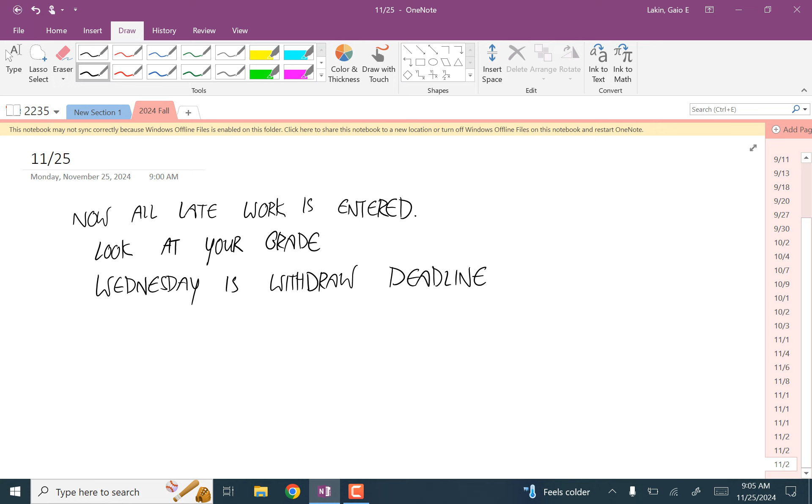All right, so we're going back to the example we were working on Friday. Oh, before we do that,

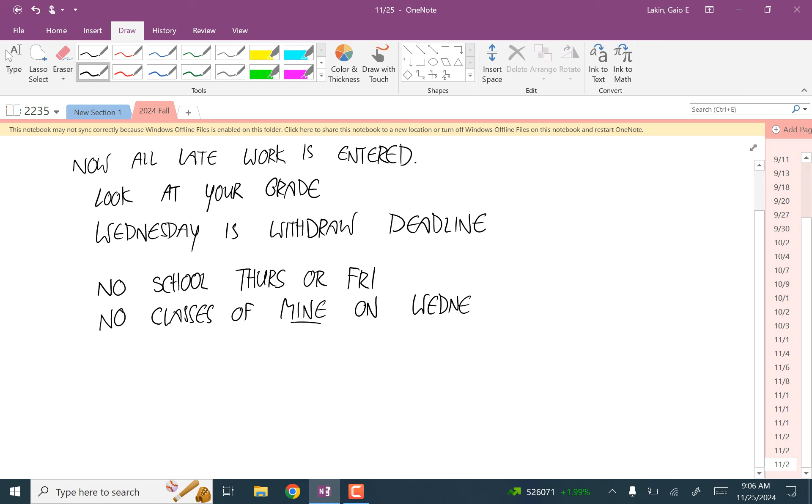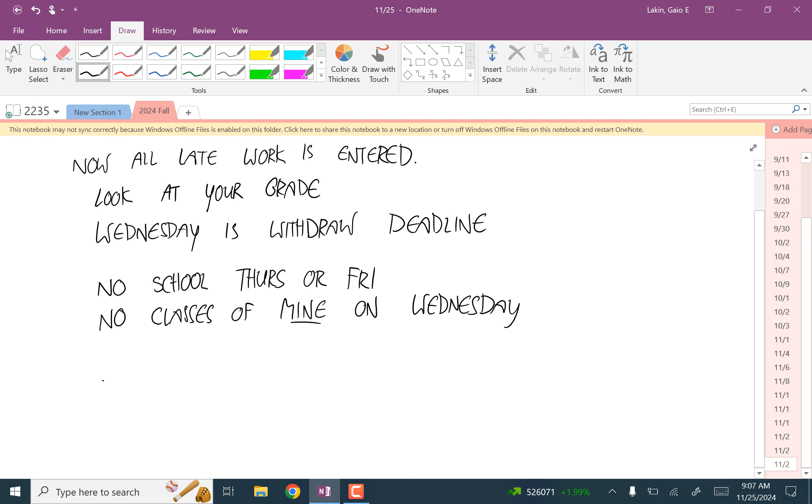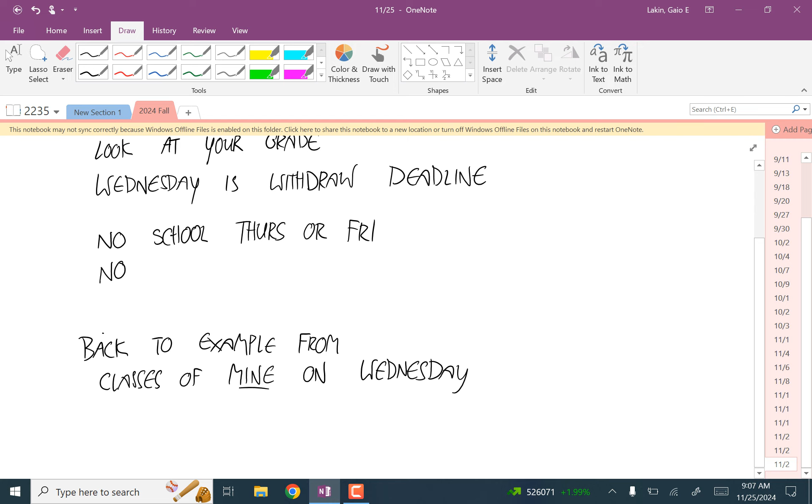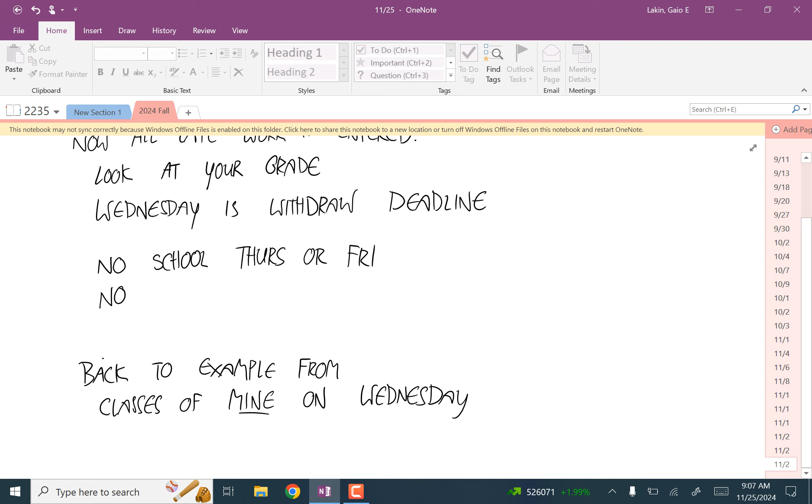All right. No, what did that do? Jesus. See, that's what happens when you try to be clever. I know.

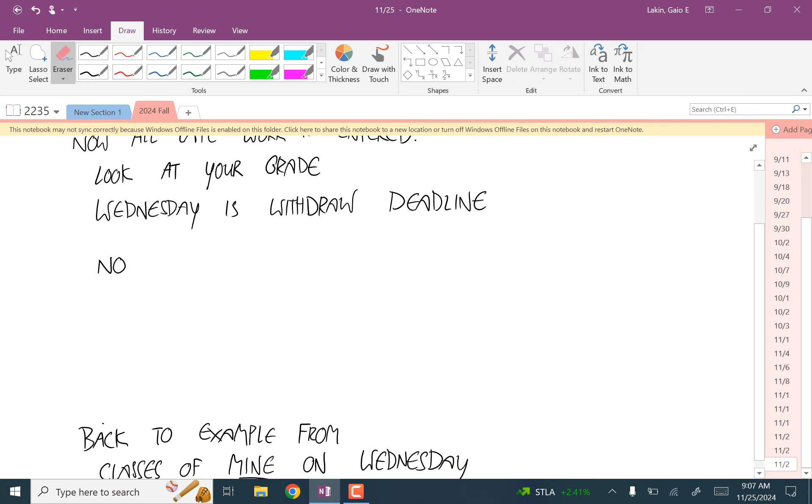Getting a little bit of a shining vibe there. No work, no play. Yeah. Yeah.

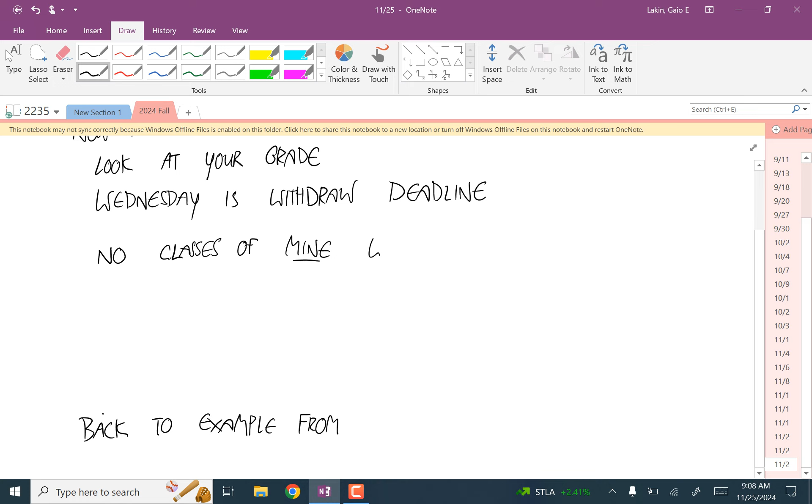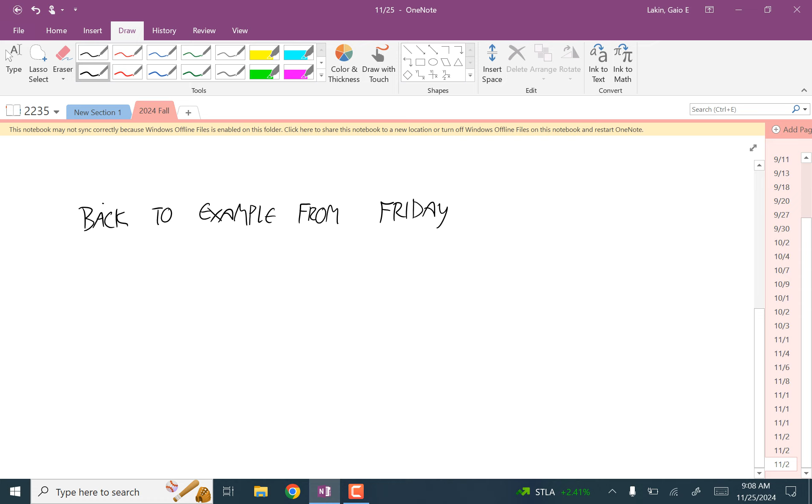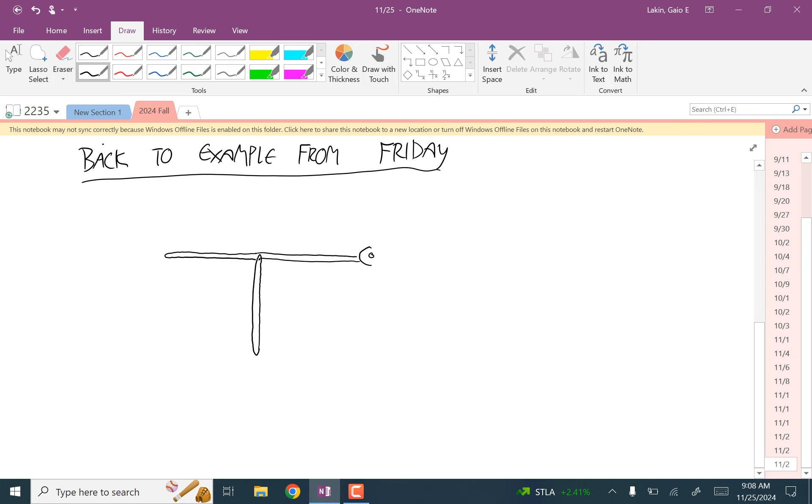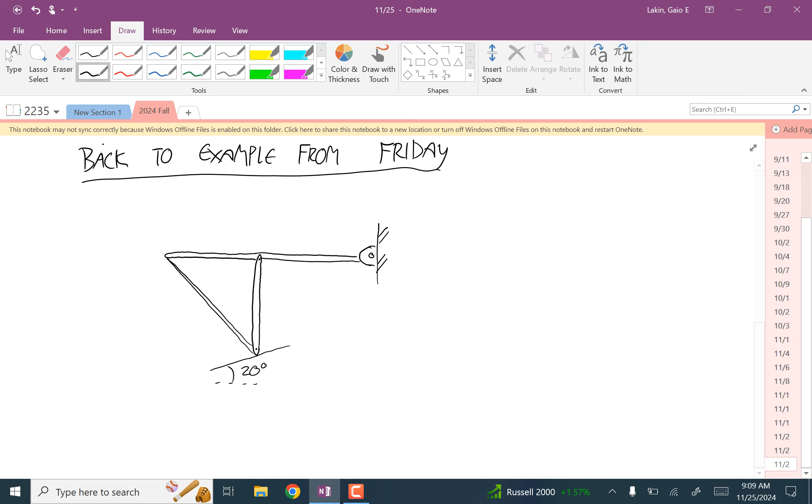Okay, so back to the example from Friday. And it looked like this. We had a vertical member, and a horizontal member, and a diagonal one connecting these two. And there was a frictionless contact here that made an angle of 20 degrees with the horizontal. And then we had a triangular distributed load there.

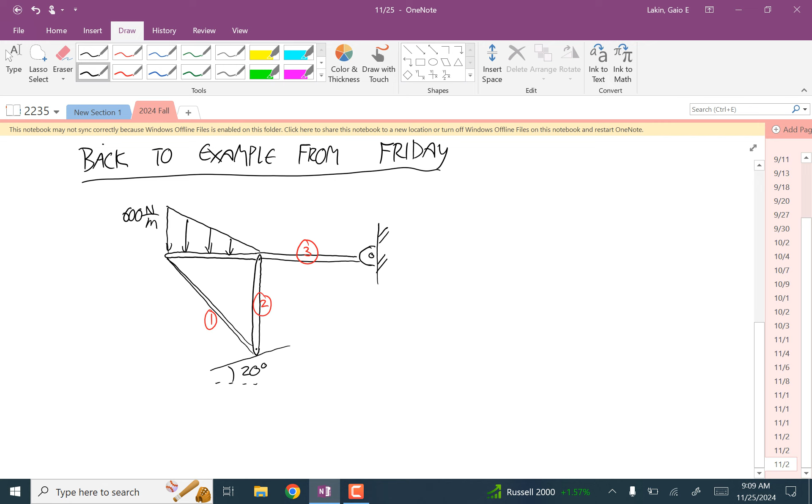I called this member 1, 2, and 3. And this was 600 newtons per meter at the highest. And this was 1 meter. This was 1 meter. And this was 1 meter.

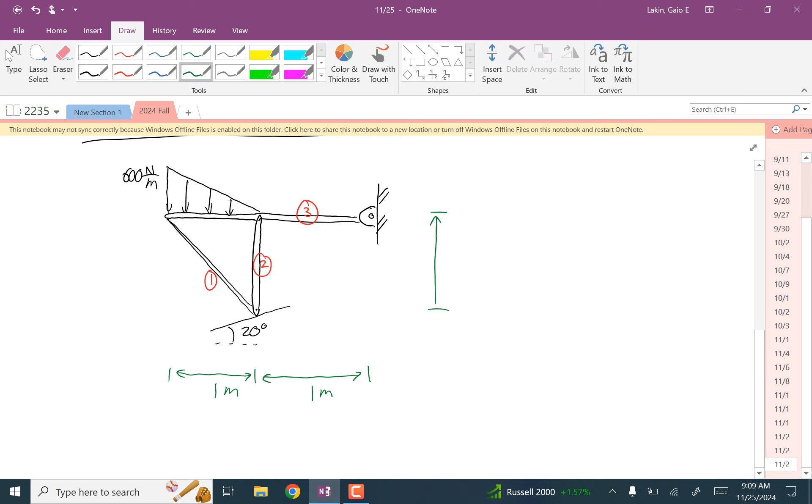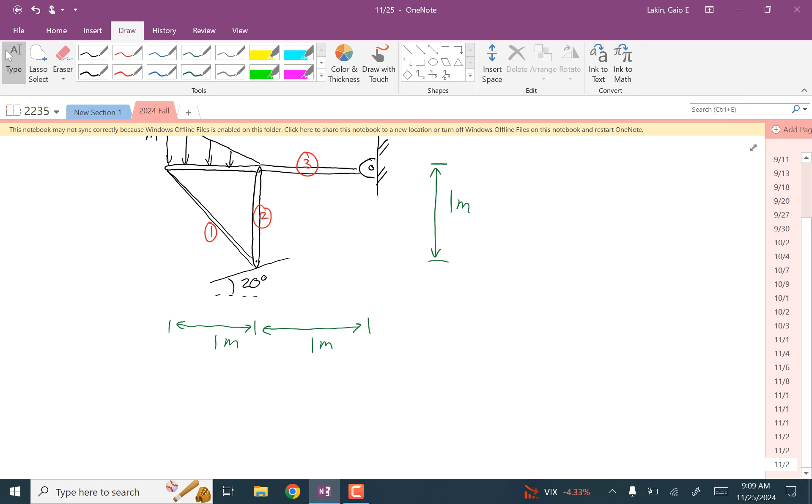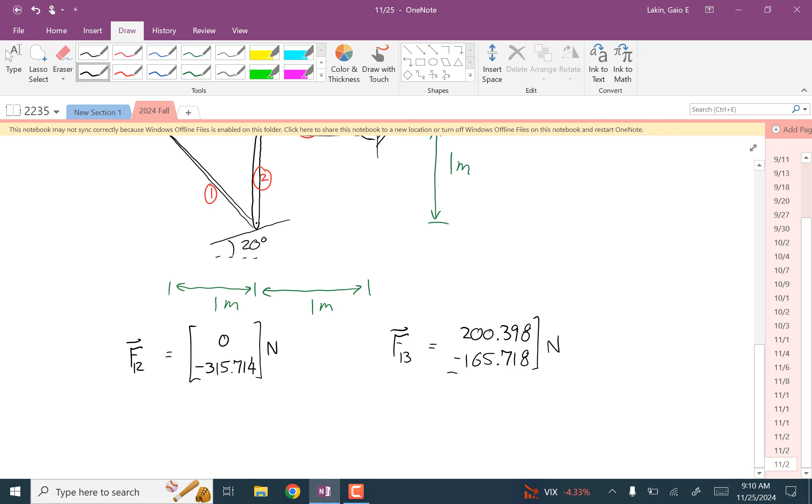And what we calculated was: F12 is equal to 0, negative 315.714. F13 is 200.398, negative 165.718. F23 is 0, negative 266.664.

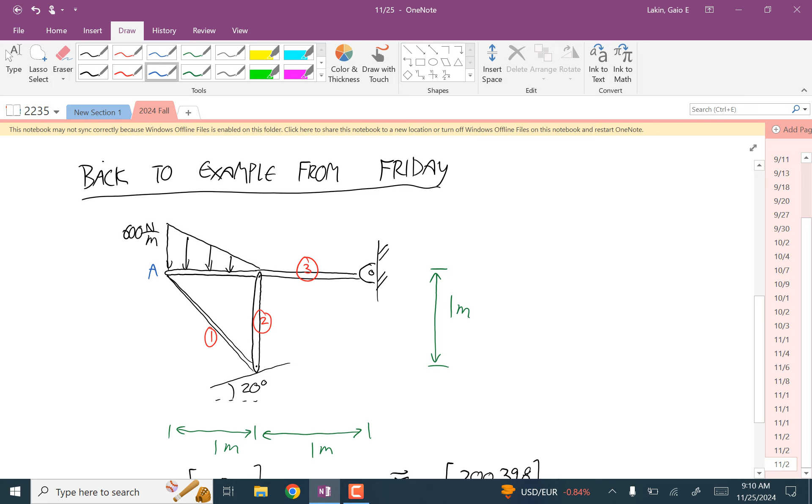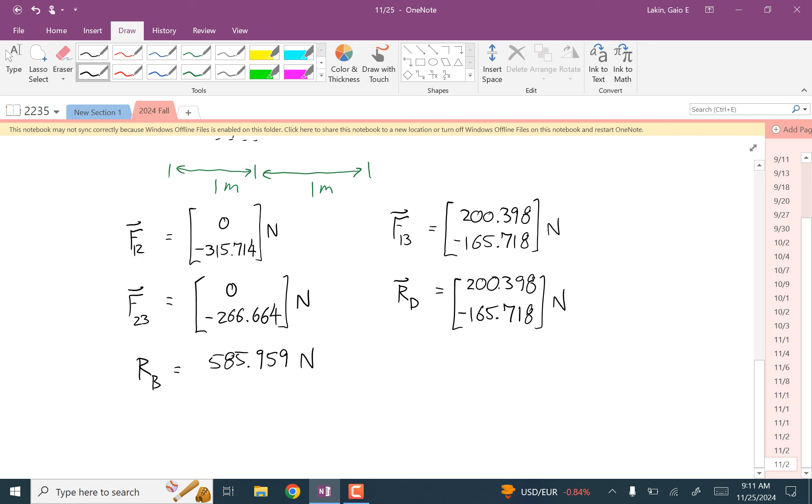RD, and I better label these. So I called them A here, B, C, D. So RD was 200.398, negative 165.718, and then the scalar RB is 585.959 newtons. Okay, so one by one now we're gonna calculate the internal loads on these bodies.

So we're gonna start out with member 1.

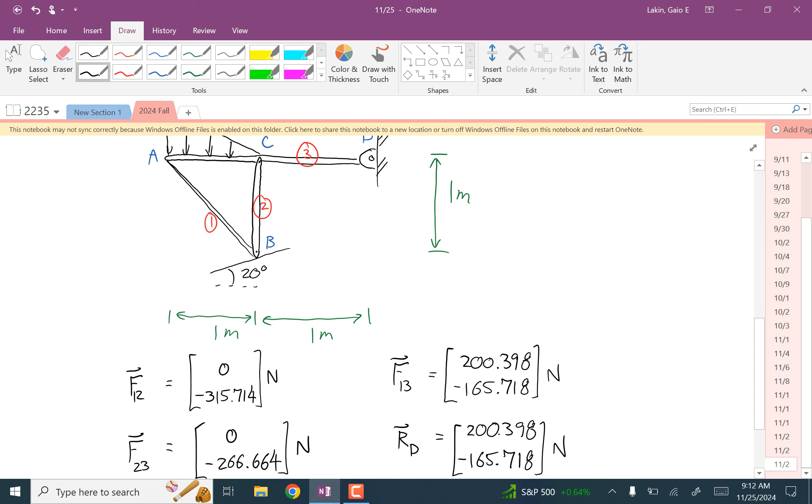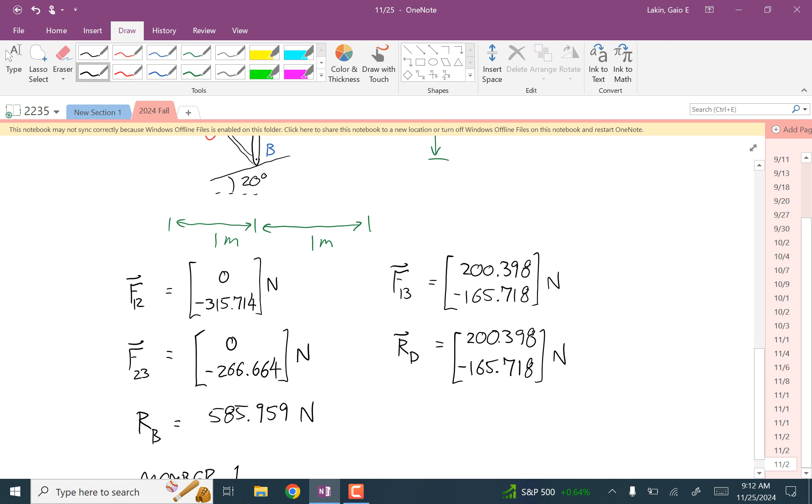So the first step is, in the coordinate system we used for the external loads with the x-axis pointing to the right and y-axis up, draw a free body diagram with the external loads on it. Use those values first. This shouldn't take too many minutes - just write out all your external loads. That's always the starting point for going to the internal loads.

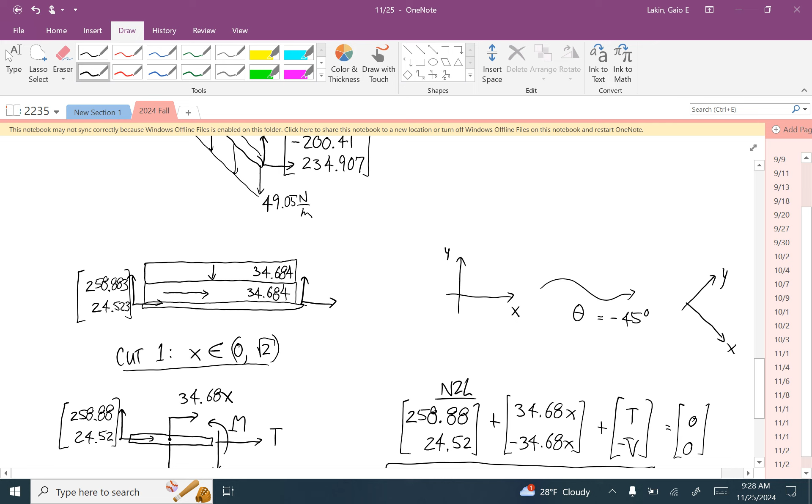You got my angle wrong. Oh, okay, so the angle is - so we're going from this to this. And so theta is negative 45 degrees. And here's what I got after putting everything into multiplying everything by the rotation matrix.

Anyone get that part? Okay, that's a good sign.

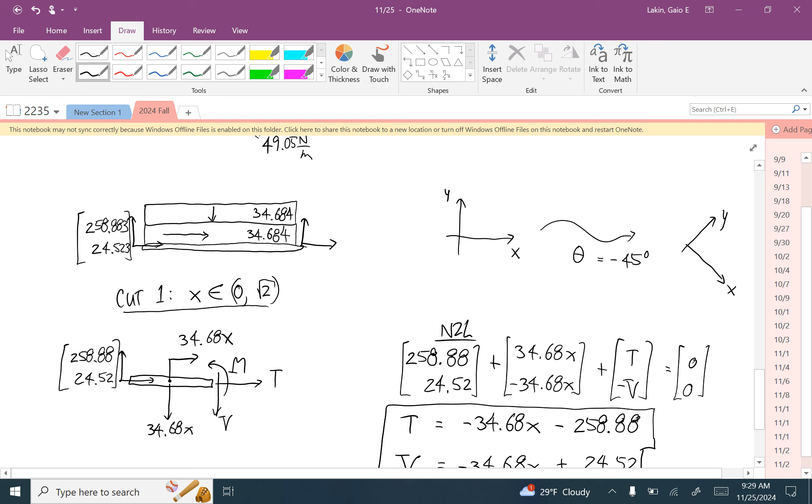And then our one cut - each one of these components of the distributed load is multiplied by x, and you can treat it like it's happening right at the midpoint. And then when you go to do your moment, the only one that produces a moment is the vertical component, and it has a moment arm of x over 2. Anybody have any questions about that?

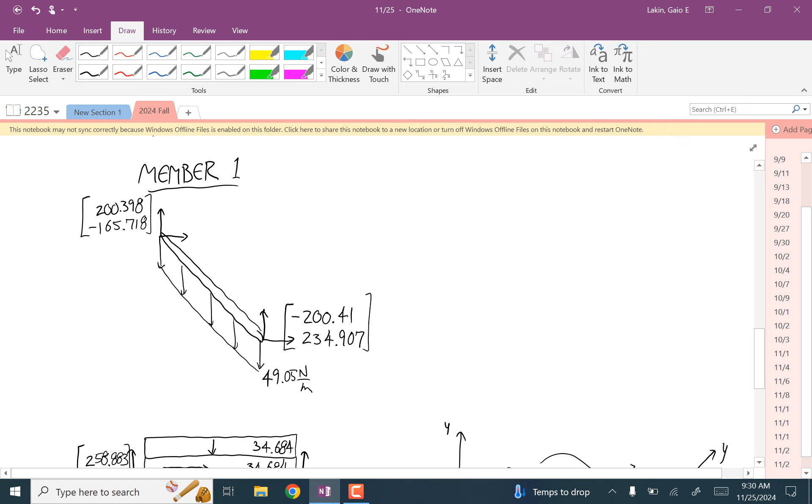Okay, so now we're going to the second member. Take a minute and draw the external loads on member 2 before we go into the internal loads.

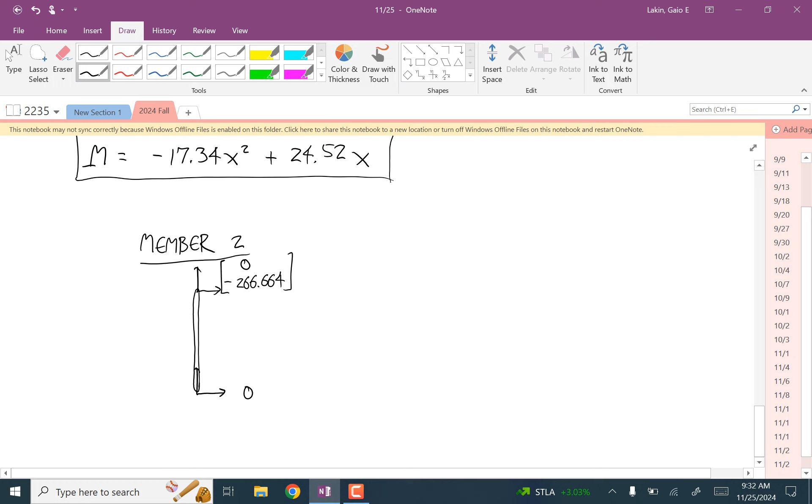So this is the vertical member. We have F23 up at the top, so that is 0, negative 266.664. At the bottom, we have negative F12, so that's 0, positive 315.714.

And then the weight is the total weight of the member, which is 49.05 newtons, divided by the length, which is 1 meter. So we have a distributed load of 49.05 newtons per meter.

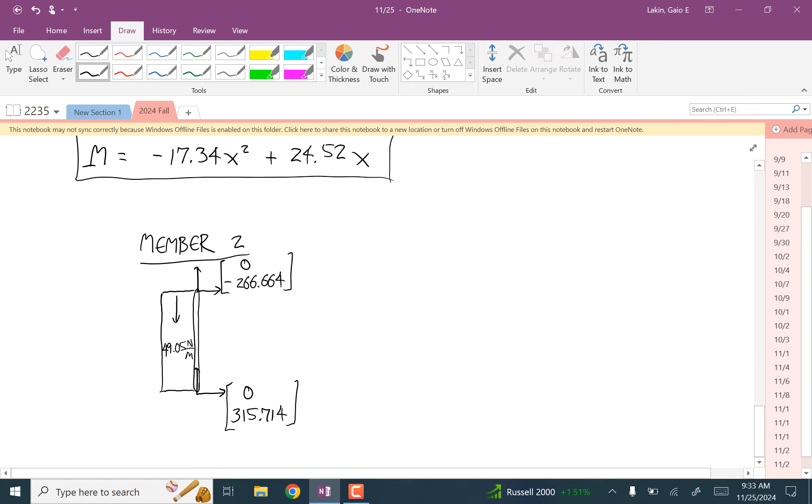For this one, let's use a coordinate system like this. It's hard to draw sideways.

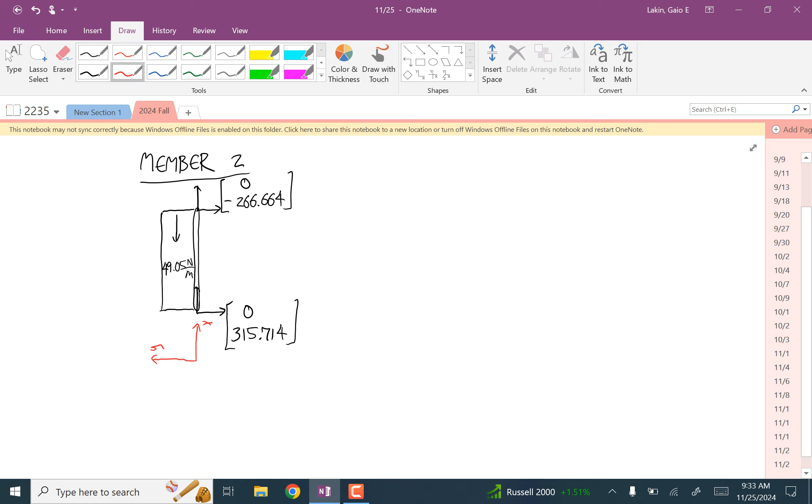So now go from this and calculate the internal loads on this member.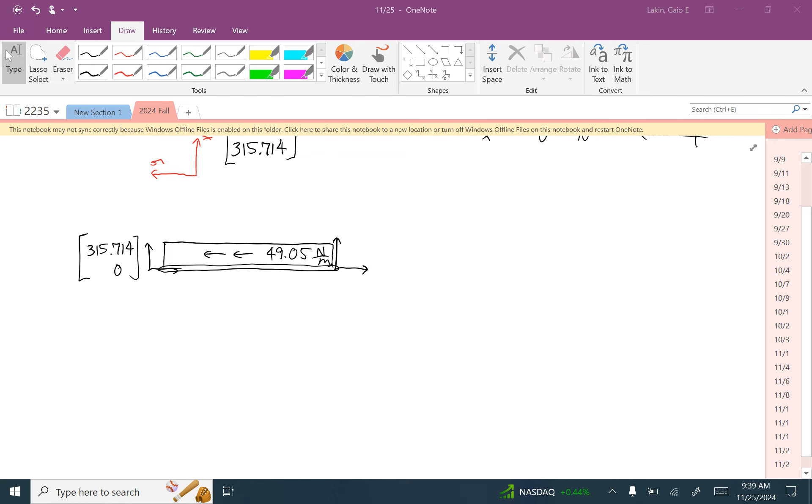So we're going from this coordinate system here to this one. That's a counterclockwise rotation of 90 degrees, so positive 90. For any 90-degree rotation, you could just think through how this component turns into what component in the other coordinate system. It also gives you a way to sanity check your answers. But I got this for my final external loads. Anybody have any questions about that?

Okay, and then again, there's only one cut on this one, so our cut is valid for all x's from 0 to 1.

And we have - I could write this again as a vector, just draw it out like this. But that's what that force at the left end is doing. And then at the midpoint, we don't have any vertical component, only a horizontal component of that distributed load. And when we make that a point force, it's 49.05 times x.

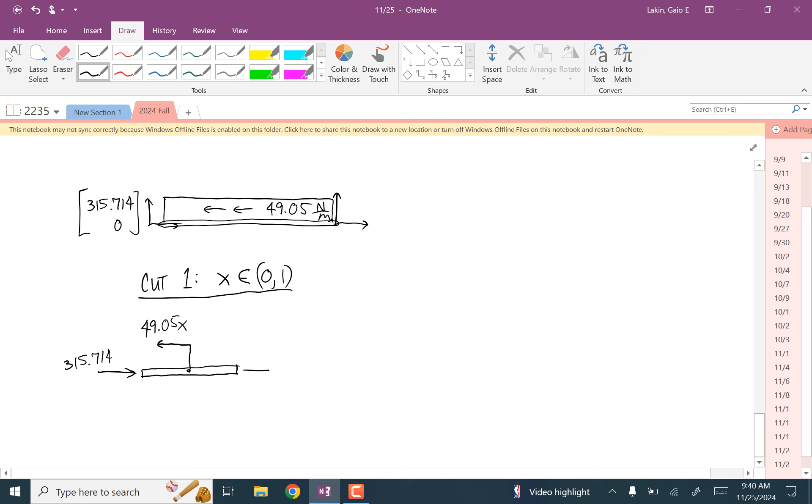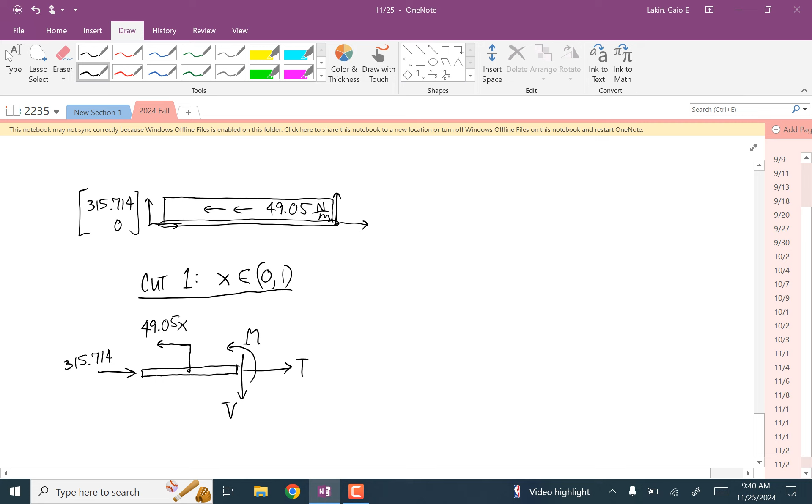And then the internal loads, T, V, and M. Anybody have any questions about that free body diagram?

So then Newton's second law says 315.71, I'm going to round now, plus negative 49.05x plus 0 plus T negative V is equal to zero.

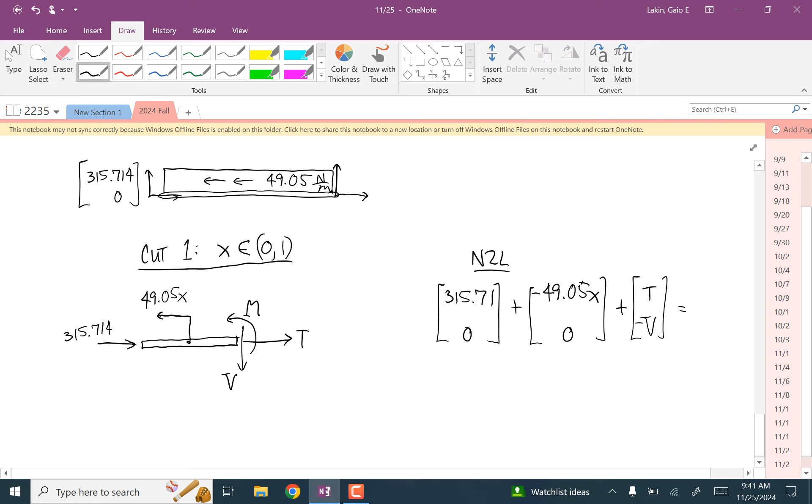So T is equal to 49.05x minus 315.71. And V is equal to 0.

This thing is just in pure tension compression, and the tension and compression just vary as you move along the length.

And so when we go to the moment equation, all we have is M minus Vx is equal to 0, so the bending moment is equal to zero the whole way. Any questions about that?

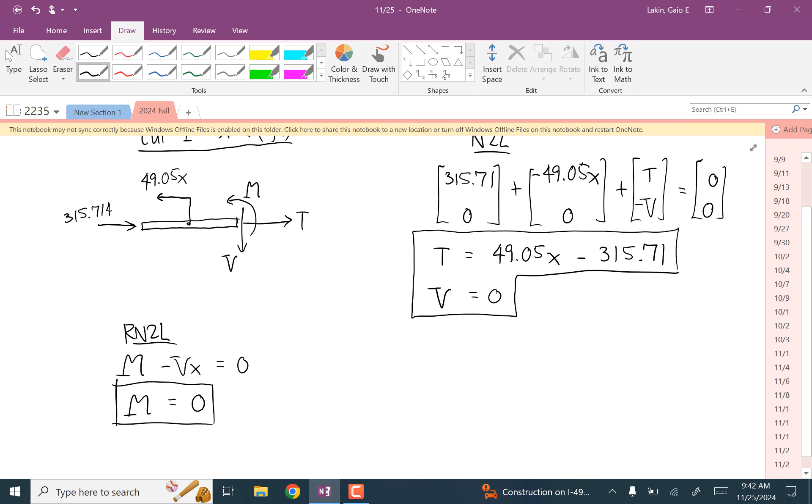Okay, and then the last one, well, we don't have to use - yes? Why is it the 1-on-2 force that's on the left and not the 2-on-3 force?

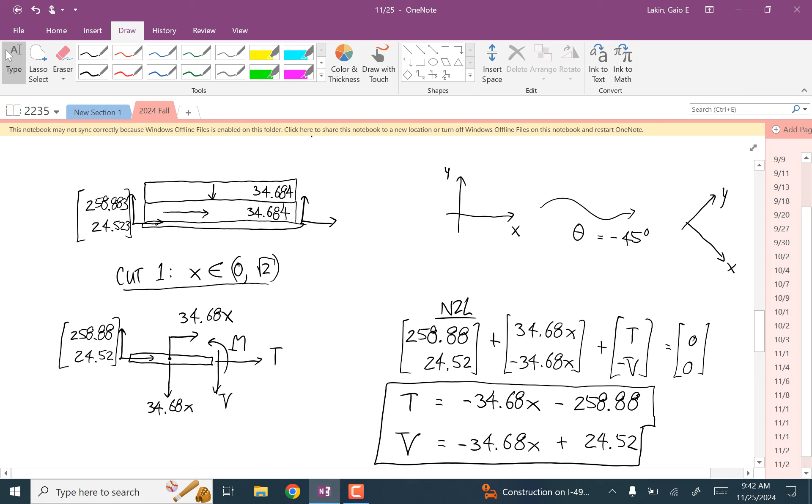So this is member 2, and you could do this either way. So if I look at the whole thing to keep our bearings - I chose for my x equals 0 to be down here, and this to be my other end, so my coordinate system is like this. And so down here at x equals 0, it's the force on 2 by 1.

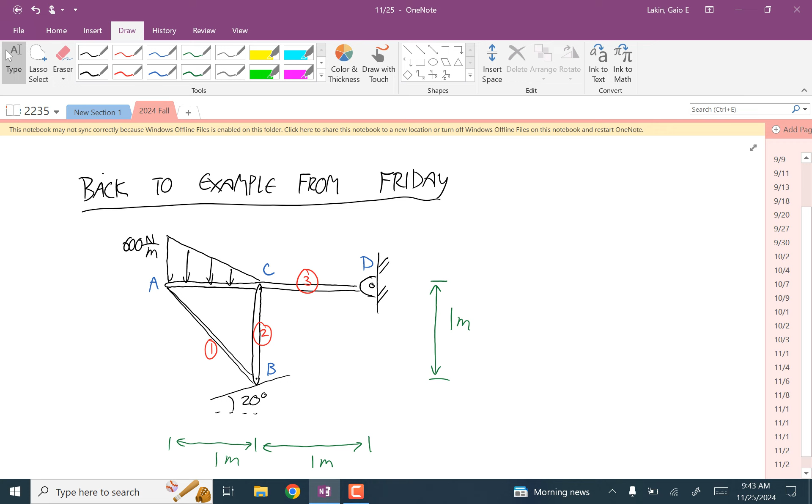You could just as easily have done it with the other x equals 0 at the other side, and then that would have been F23. We would have gotten functions that look different, but any location you plugged into the function would give the same values.

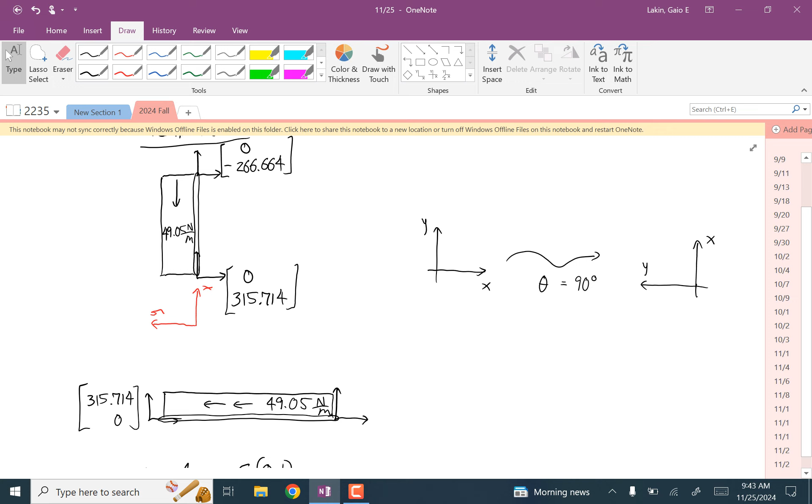It was going in our negative y before. Now it's going in our negative x.

I was thinking about rotating it also and having it point down. Don't think about rotating the vector. Think about rotating the coordinate system around the vector. Don't think about rotating the body, think about the coordinate system.

So in this case, the vector is going this way, which in our original coordinate system before we rotate is our negative y direction. Then we want to rotate it into this new coordinate system, so that same downward vector is now in the negative x.

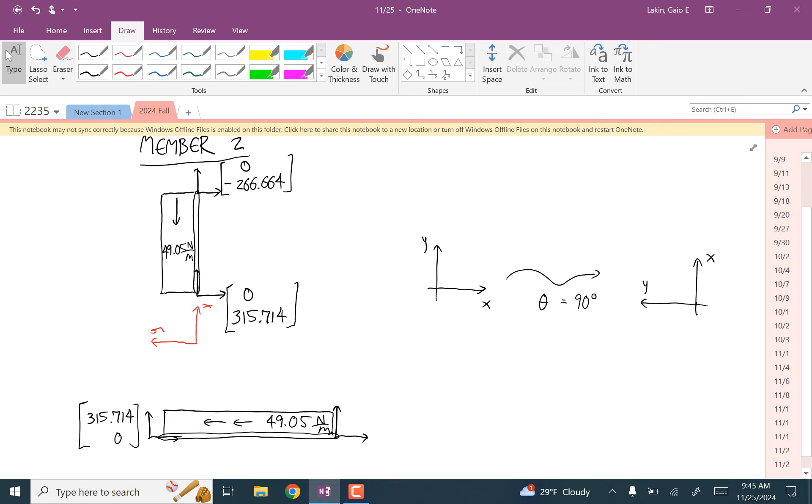Okay, so now we're on the last one, and we don't have to use a rotation matrix for this one, but the calculations are messier. So this is member 3 now.

Would it maybe be a good idea to consider doing like a 180? For sure, yeah, it absolutely is the way to go on this. So let's take a minute, calculate the external loads on this, draw out the free body diagram, and then I'll talk about that.

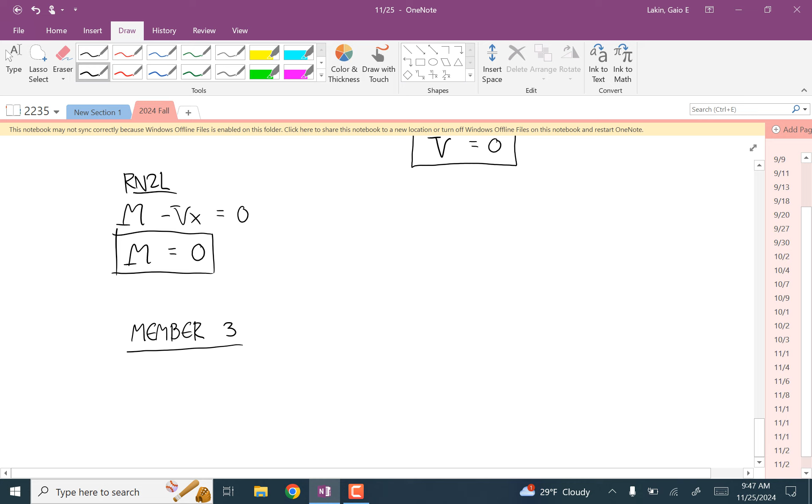Instead of rotating, why not? I know I'm cutting you short here, but let me finish doing this, do the setup, and then I'm going to assign this internal load problem as the one thing for you to do for a week from now.

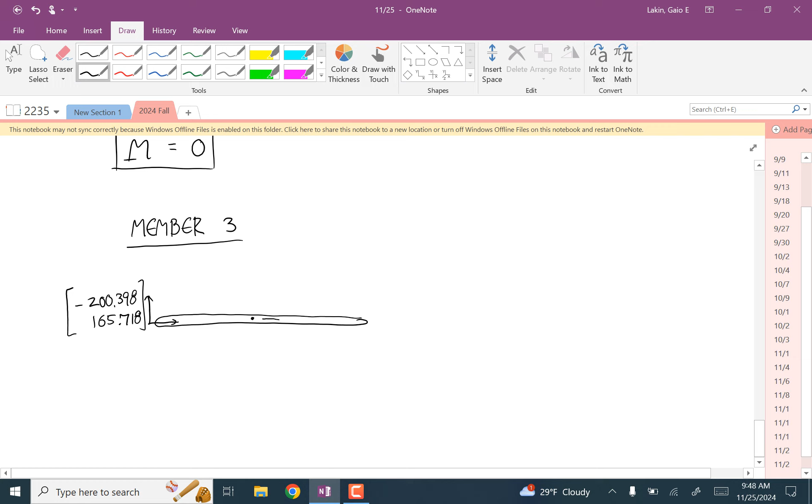Okay, so for member 3, over here we have negative F13, so that's negative 200.398, positive 165.718. And then at the middle, we have negative F23, so that's 0, positive 266.664.

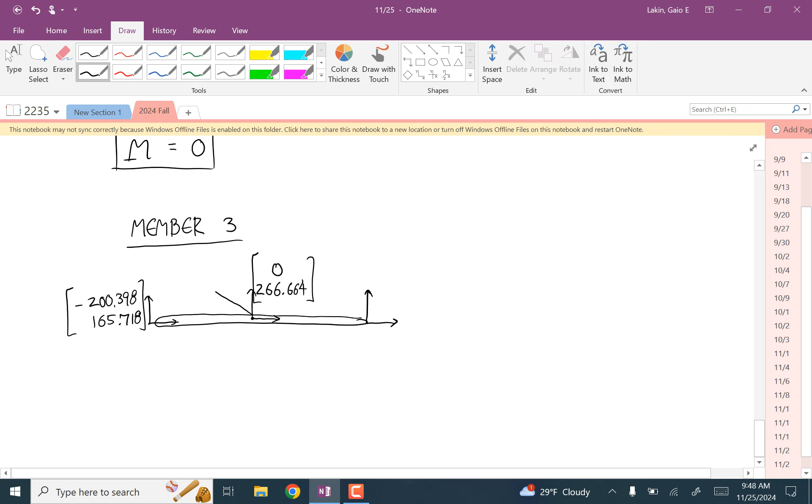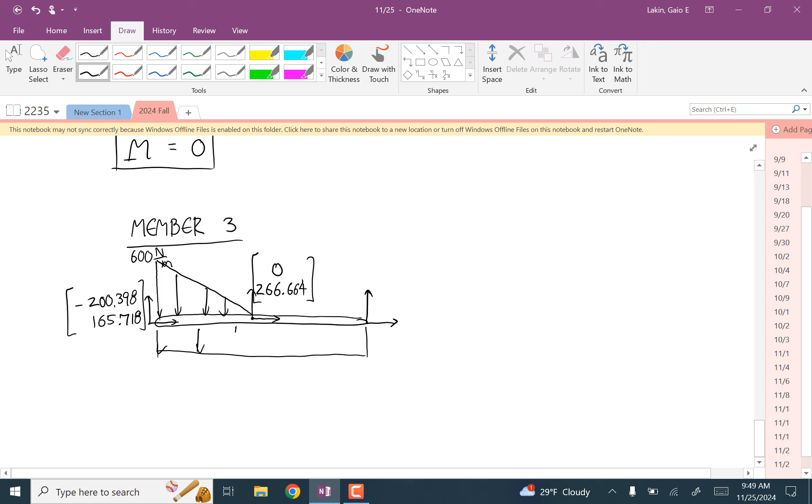And then we have something over here that isn't going to come into the internal loads. And then we have the distributed load, the triangular one, which goes up to a maximum value of 600. And then we have the uniform distributed load representing the weight, a total weight of 98.1 divided by 2, so we get 49.05 newtons per meter.

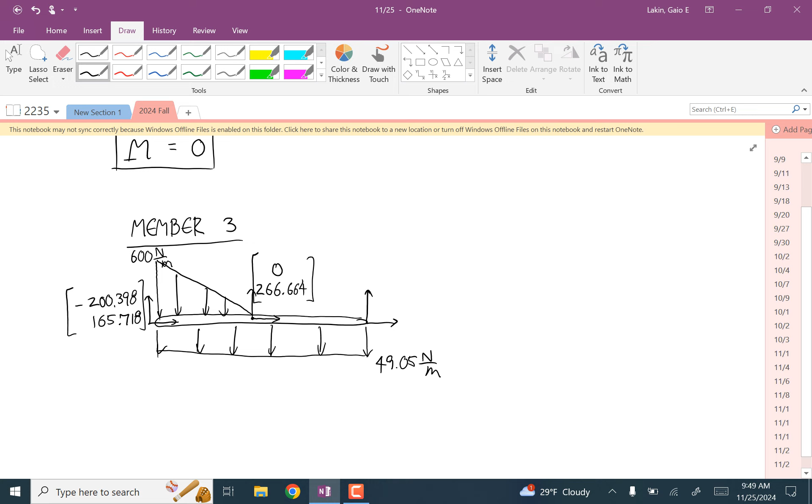Okay, so now we have to calculate the internal loads for this. But think about what would happen when we have that. This is going to take 2 cuts because we have some stuff happening at the middle that we have to switch over to another function. But think about the first cut.

So this is going to have this point load, it's going to have a distributed load like this, it's going to have the internal loads. But the thing that makes this a mess is if you cut somewhere in that left half of the beam, your triangular distributed load isn't a triangle anymore, it's a trapezoid. You can break it up into a triangular one on top of a rectangular one and do some geometry, but it's a lot worse than dealing with it as a triangle.

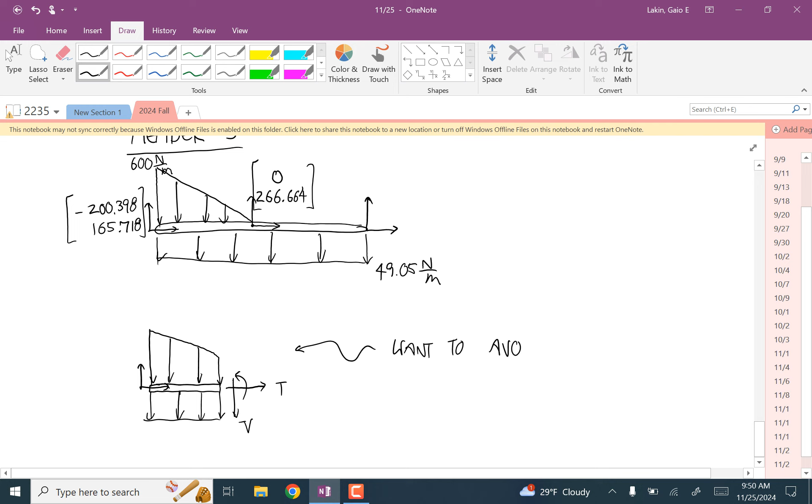So we want to avoid this. Instead, just imagine going to the other side of this. And so we'll end up with...

Then I have to do this too, I do have to do this one at D. So our D is going, so this is 200.398, negative 34.282.

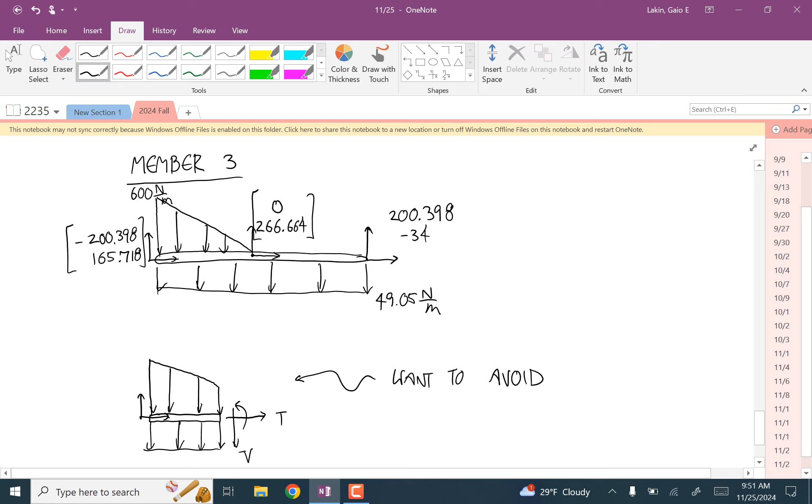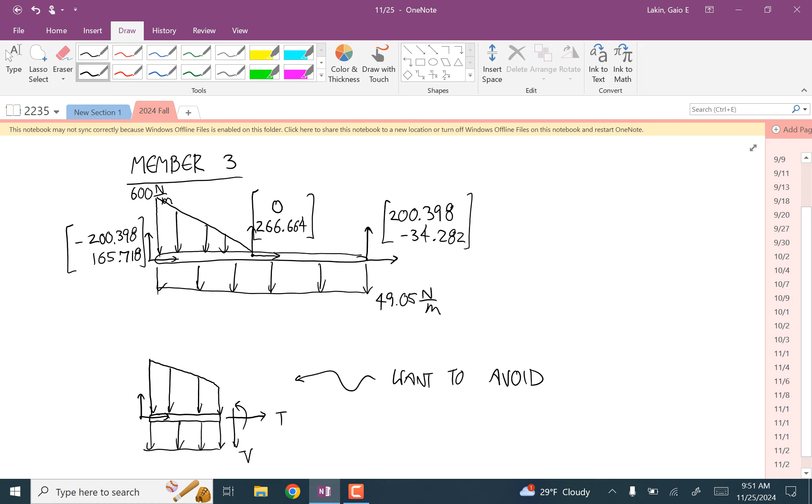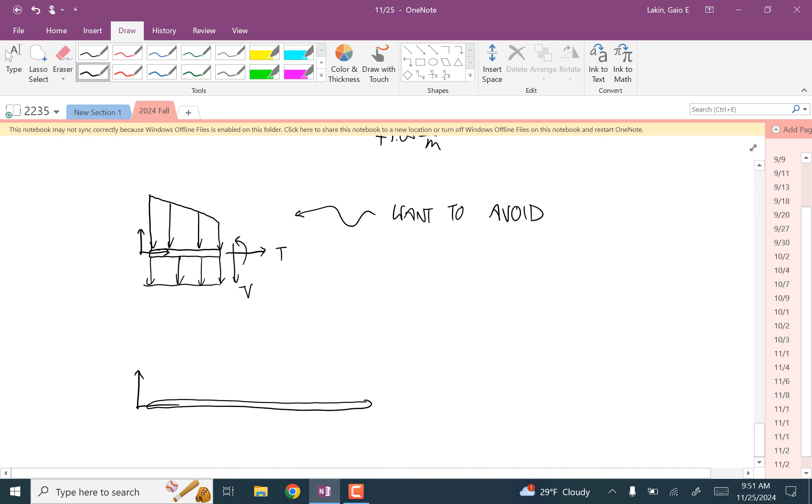So what would you see if you went around to the other side? Up is still up, down is still down, but what you used to see as left is now right, and vice versa. And so now we have this force over here where the y values stay the same, but the x values are all negative.

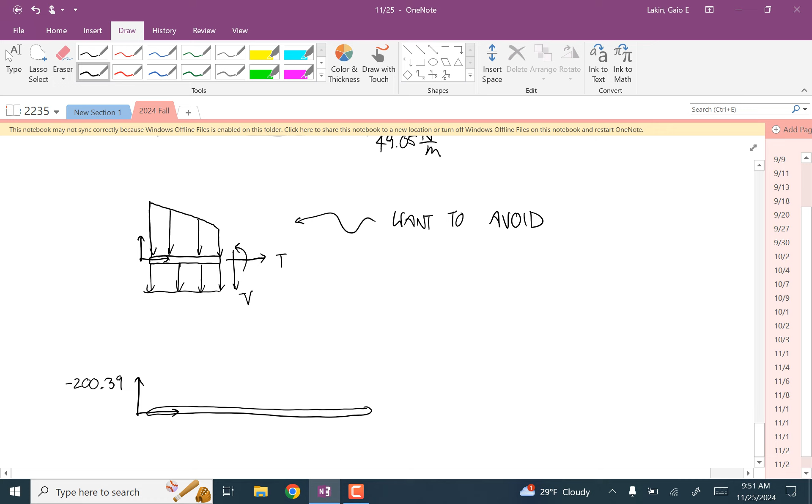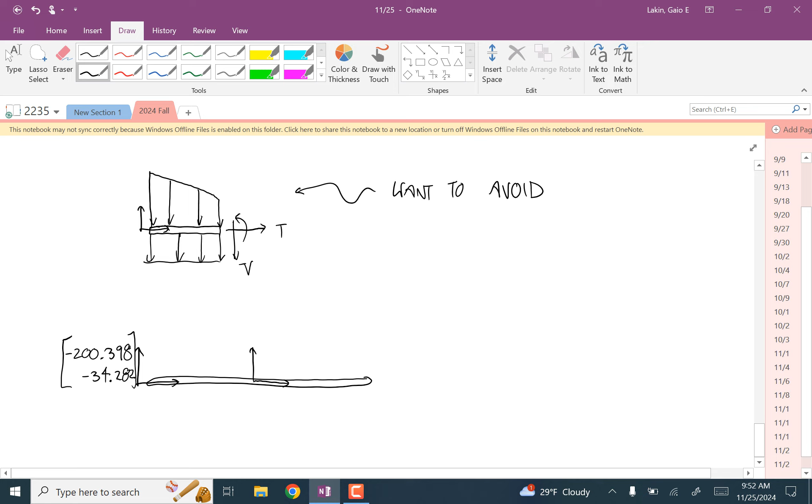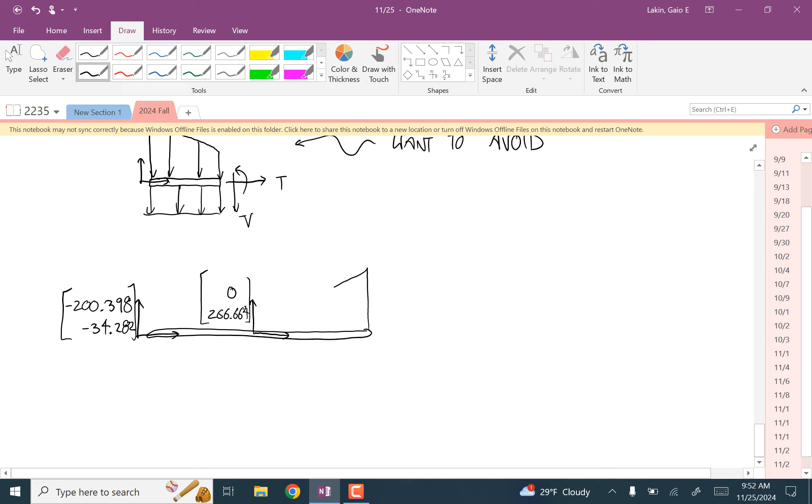Are you with me on that? And at the midpoint we have 266.664. And then now this is oriented in a way where if we make a cut inside of this triangle somewhere, that distributed load is still a triangle.

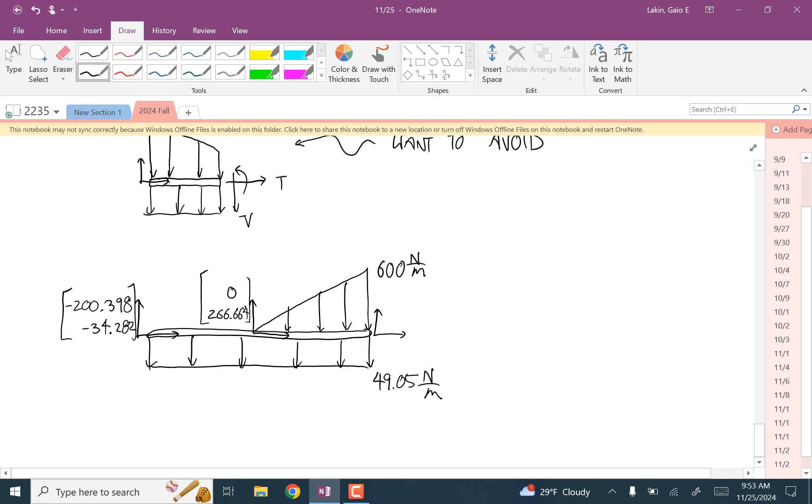And then don't forget about the uniform distributed load for the weight. Okay, so for next week, do, a week from today, calculate the internal loads for this. That's all.